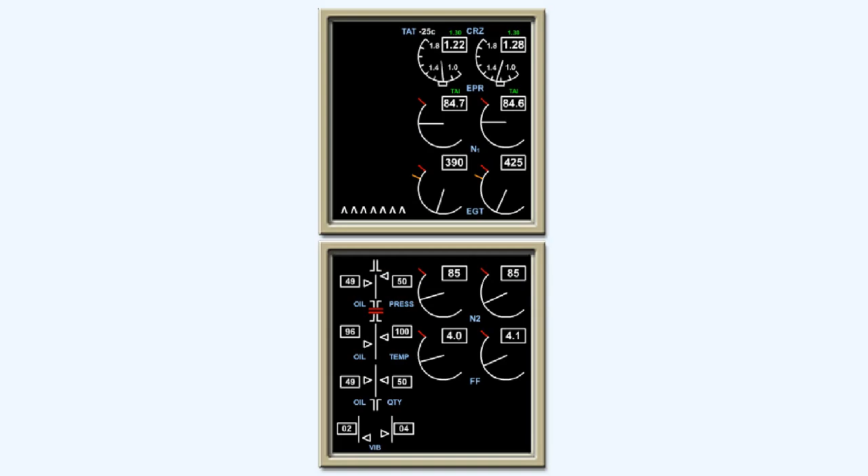As far as EICAS is concerned, engine operating data is displayed on its cathode ray tube units, thereby eliminating the need for traditional engine instruments.

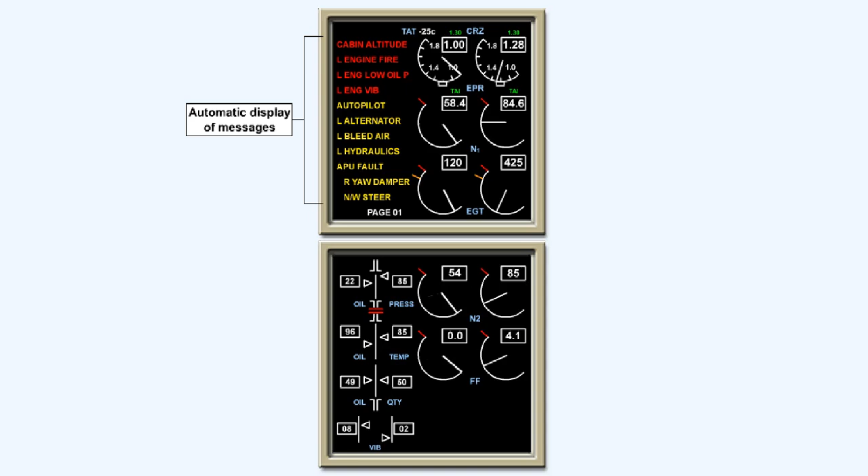Engine operating data, as well as that relevant to other systems, is not necessarily always on display. But in the event of malfunctions occurring at any time, the flight crew's attention is drawn to them by an automatic display of messages in appropriate colors.

However, in the Airbus A310, in which system operation was displayed in checklist and schematic form, the early ECAM concept was based on the view that engine data needed to be displayed during the whole of a flight, and accordingly traditional engine instruments were retained.

It's of interest to note, however, that in subsequent types produced by this manufacturer, for example the A320, the ECAM system is developed to include the display of engine data in one of its display units.

The basic EICAS system comprises two display units, a control panel which is called the Display Select panel, and two computers which are supplied with analog and digital signals from engine and system sensors. The computers are designated left and right, and only one is in control at a time. The other is on standby, and in the event of failure, it may be switched in either automatically or manually.

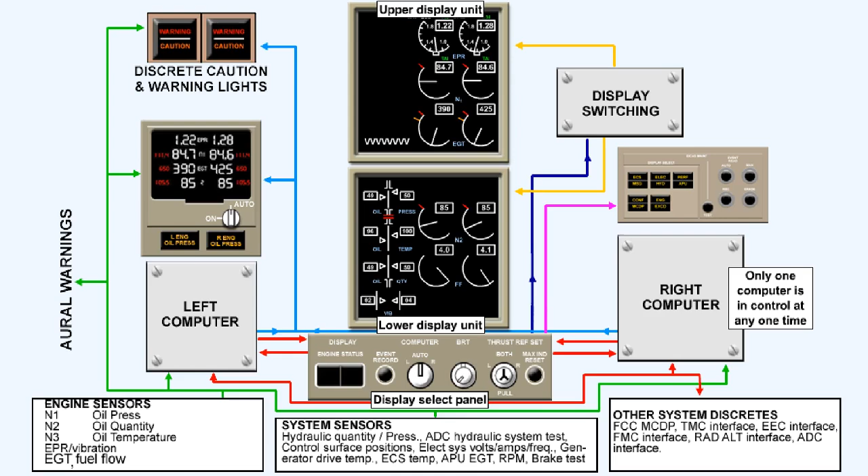Operating in conjunction with the EICAS system are discrete caution and warning lights, which are situated on the front coaming, a standby engine indicator panel, and a remotely located panel for selecting maintenance data displays.

The system provides the flight crew with constantly displayed information on primary engine parameters, and with secondary engine parameters and advisory, caution, warning alert messages displayed as required.

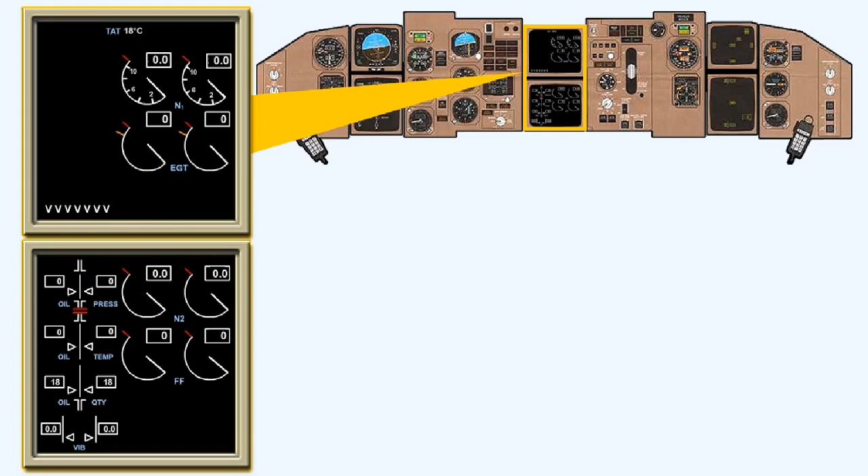The display units provide a wide variety of information relevant to engine operation and operation of other automated systems, and they utilize color cathode ray tubes. The units are mounted one above the other.

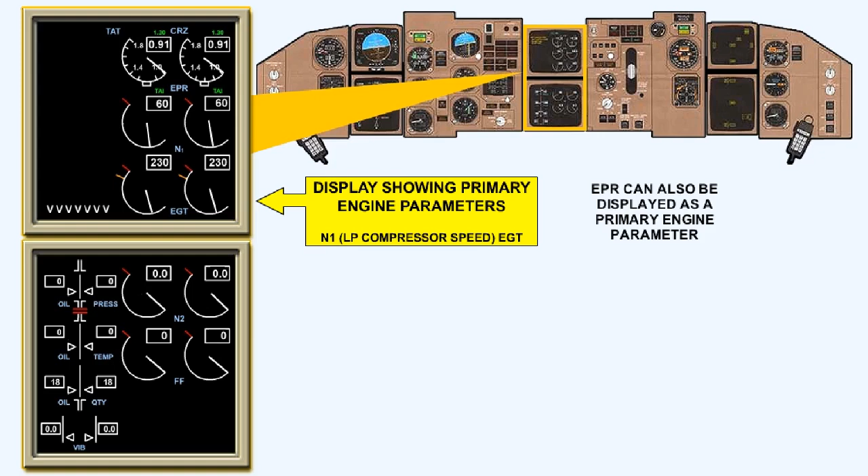The upper unit displays the primary engine parameters, N1 speed, exhaust gas temperature, and warning and caution messages. In some cases, this unit can also display the engine pressure ratio, depending on the type of engines installed and on the methods used to process data by the thrust management control system.

The lower unit displays secondary engine parameters, that is N2 speed, fuel flow, oil quantity, pressure and temperature, and engine vibration.

In addition, the status of non-engine systems, for example, flight control surface positions, hydraulic systems, the auxiliary power unit, etc., can also be displayed, together with aircraft configuration and maintenance data.

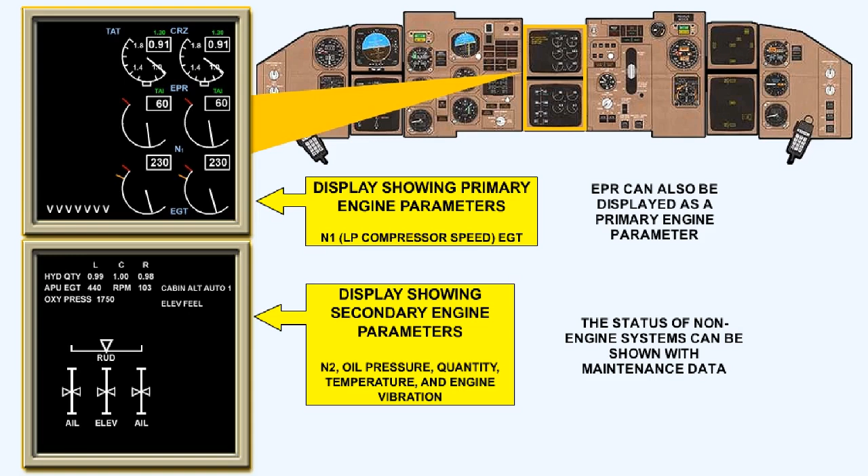The row of V's shown on the upper display unit only appears when secondary information is being displayed on the lower unit.

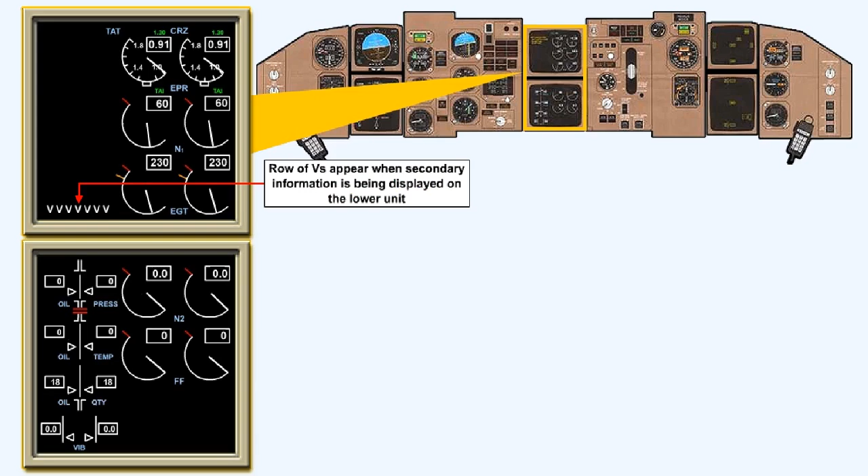Seven colors are produced by the cathode ray tubes, and they are used as follows. White: all scales, normal operating range of pointers, digital readouts. Red: warning messages, maximum operating limit marks on scales, and digital readouts.

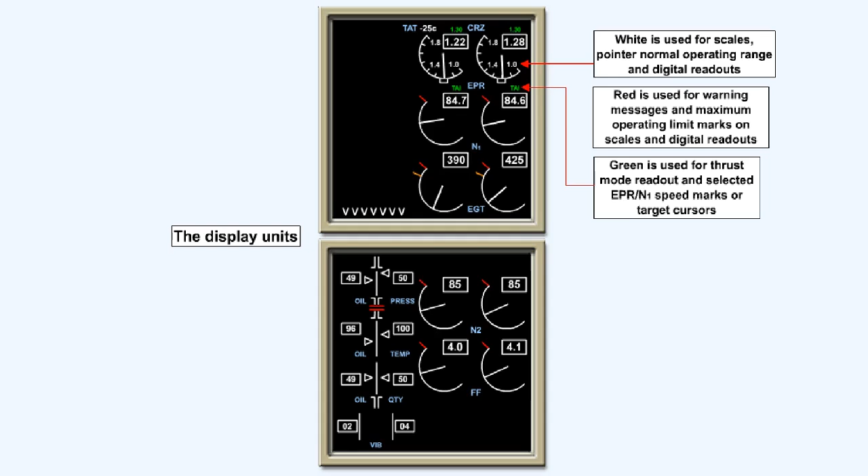Green: thrust mode readout and selected EPR and N1 speed marks or target cursors. Blue: system testing only.

Yellow: caution and advisory messages, caution limit marks on scales, digital readouts. Magenta: during in-flight engine starting and for cross-bleed messages. Cyan: names of all parameters being measured, for example, N1, oil pressure, TAT, etc., and status marks or cues.

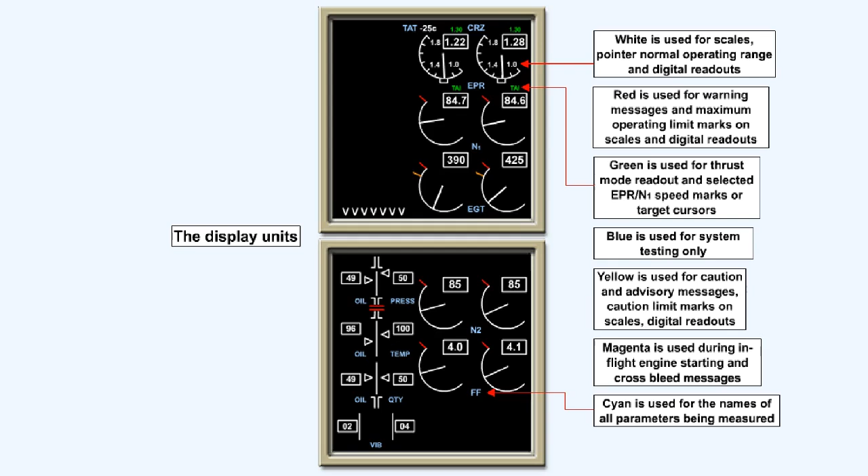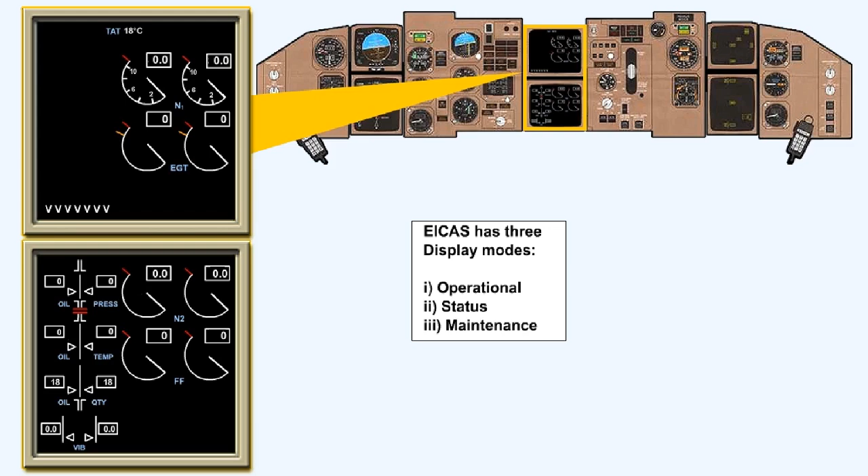EICAS is designed to categorize displays and alerts according to function and usage, and for this purpose there are three modes of displaying information: operational, status, and maintenance.

Operational and status modes are selected by the flight crew on the Display Select panel, while the maintenance mode is selected on the maintenance panel, which is for the use of ground engineering staff only.

The operational mode displays the engine operating information and any alerts which are required to be actioned by the crew. Normally, only the upper display unit presents information.

The lower one remains blank, but it can be selected to display secondary information as and when required by pressing the Engine button on the Display Select panel.

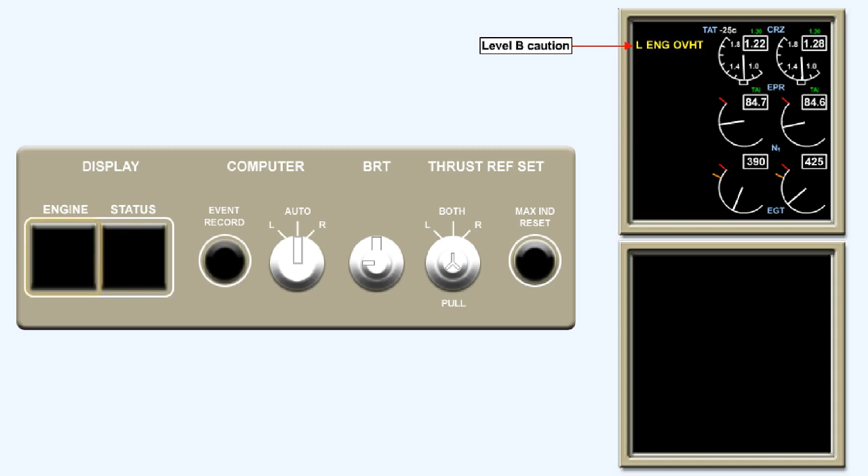Use your mouse to press the Engine button on the Display Select panel to see secondary information being shown on the bottom screen.

When selected by pressing the Status button on the Display Select panel, the Status mode allows data to be displayed on the bottom screen, which is used to determine the dispatch readiness of an aircraft. This data is closely associated with details contained in the aircraft's minimum equipment list.

The display on the bottom screen shows positions of the flight control surfaces in the form of pointers registered against vertical scales, selected subsystem parameters, and equipment status messages. Selection is normally done on the ground, either as part of the pre-flight checks of dispatch items or prior to shutdown of electrical power, to aid the flight crew in making entries in the aircraft's technical log.

Use your mouse to press the Engine and Status buttons on the Display Select panel to change the information shown on the bottom display between engine secondary information and the status display.

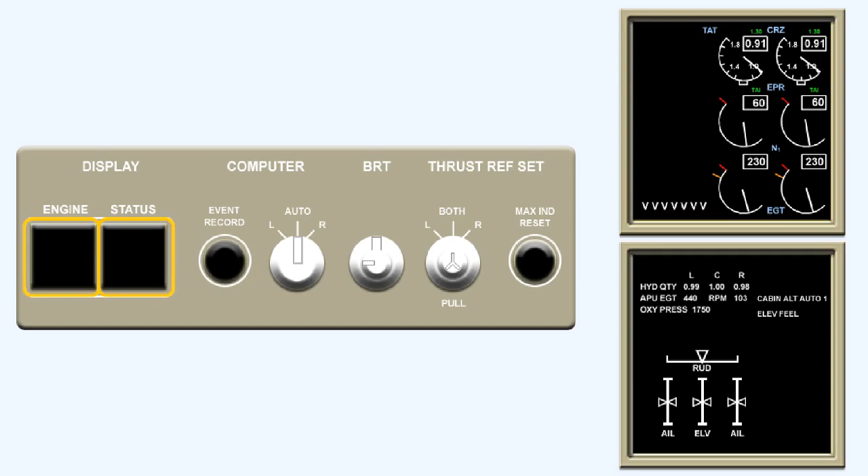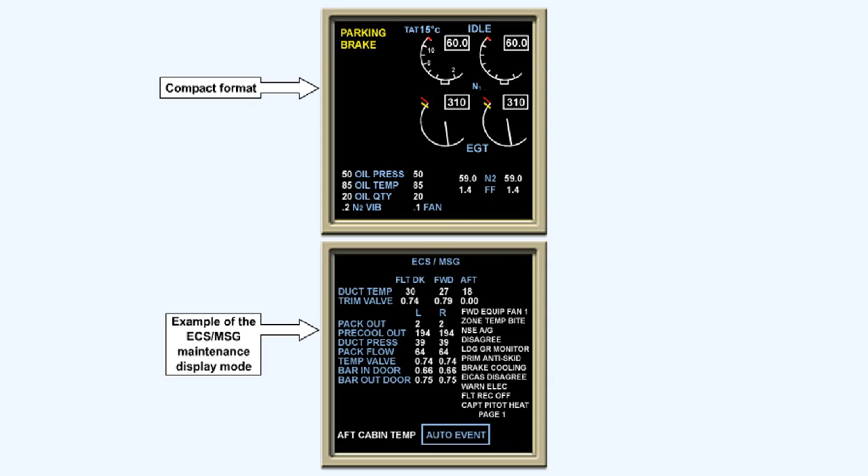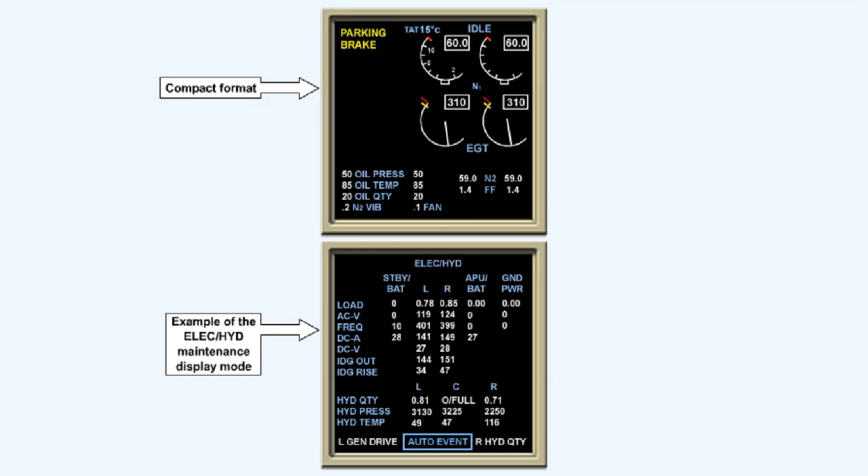The Display Select panel permits control of EICAS functions and displays, and can be used both in flight and on the ground. It's located on the center pedestal on the aircraft flight deck. Moving your mouse cursor over each control will display the purpose of each of them.

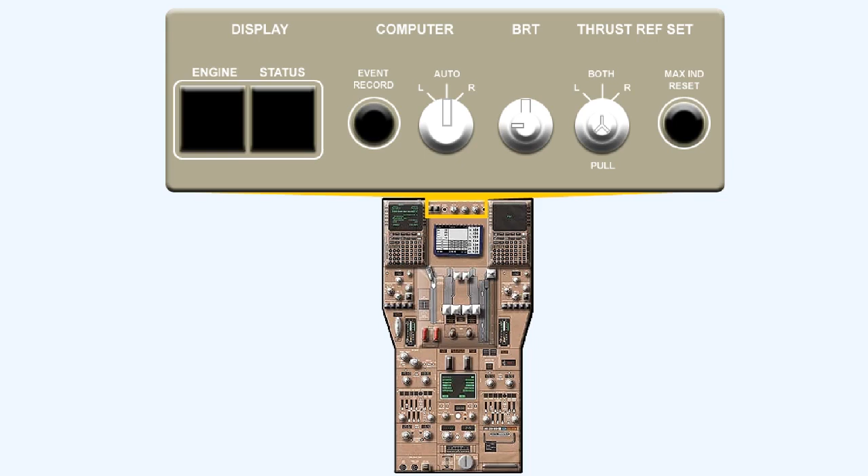The system continuously monitors a large number of inputs, typically over 400 from engine and airframe system sensors, and will detect any malfunctioning of systems.

If any malfunction should occur, then appropriate messages are generated and displayed on the upper display unit in a sequence corresponding to the level of urgency of action to be taken.

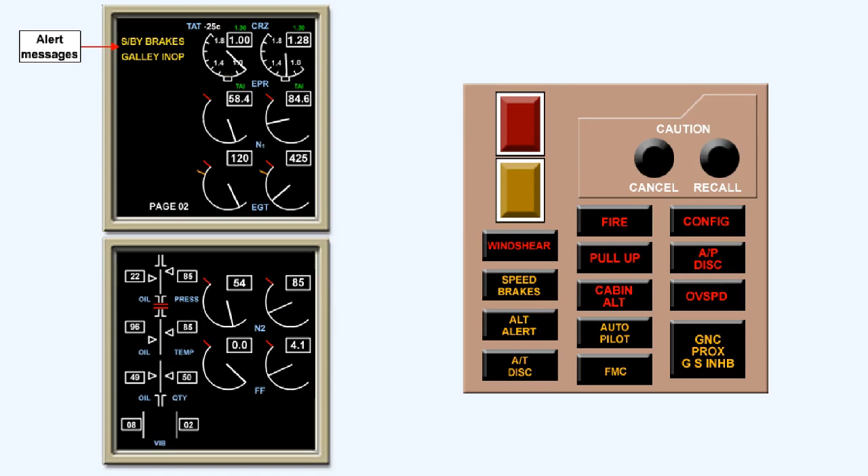Up to 11 messages can be displayed on the top line at the left of the display screen and at the following levels.

Level A, Warning, requiring immediate corrective action. Level A warnings are displayed in red. Master warning lights are also illuminated, and aural warnings, for example the fire bell, from a central warning system are given.

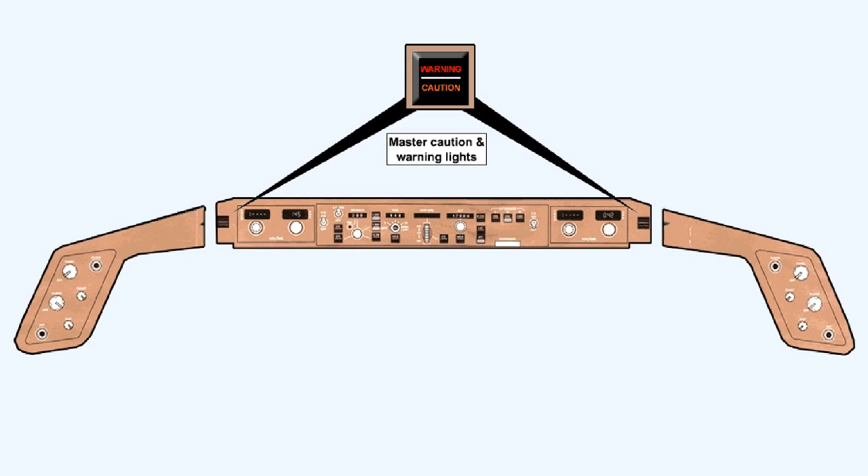Level B, Caution, requiring immediate crew awareness and possible action. These are displayed in amber, and also by master caution lights. There is also an aural tone which is repeated twice.

Level C, Advisory, requiring crew awareness. Advisories are also displayed in amber. No caution lights or aural tones are associated with this level.

In order to differentiate between a caution and an advisory, the latter is always indented one space to the right.

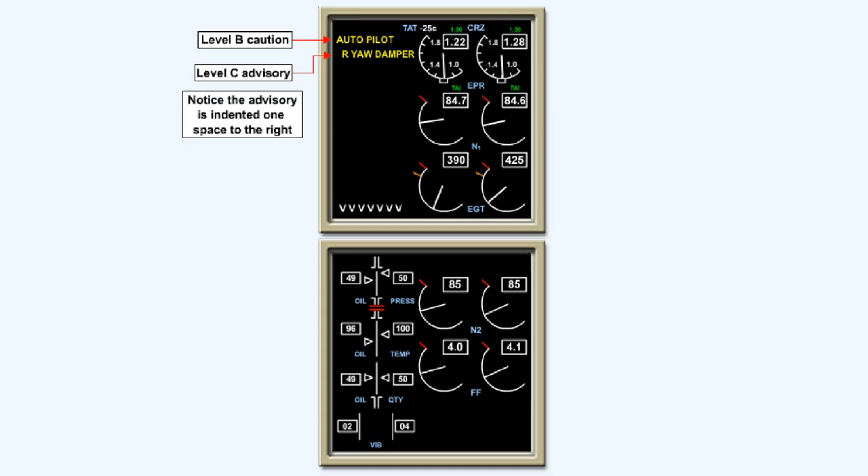When a new fault occurs, its associated message is inserted on the appropriate line of the display. The occurrence of a new fault may cause older messages to move down one line. For example, a new warning message would cause all existing warning, caution, and advisory messages to move down one line.

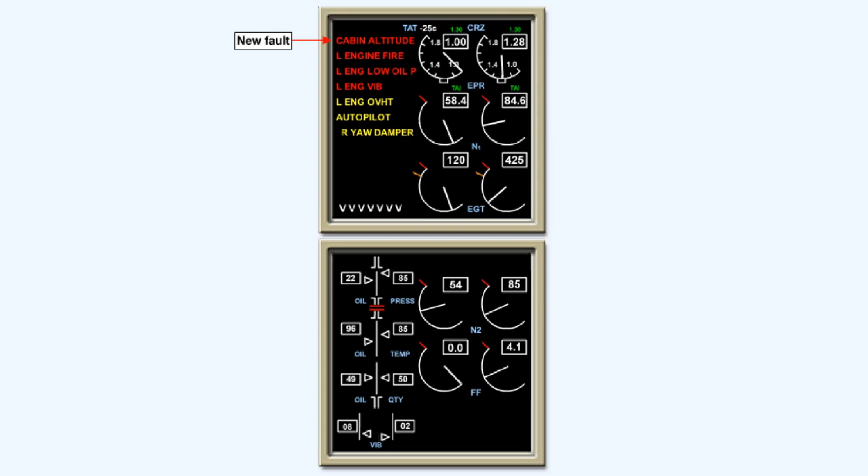A message is automatically removed from the display when the associated condition no longer exists. In this case, messages which appear below the deleted one each move up a line.

If there are more messages than can be displayed at one time, the whole list forms what is termed a page, and the lowest message is removed, and a page number appears in white on the lower right side of the list.

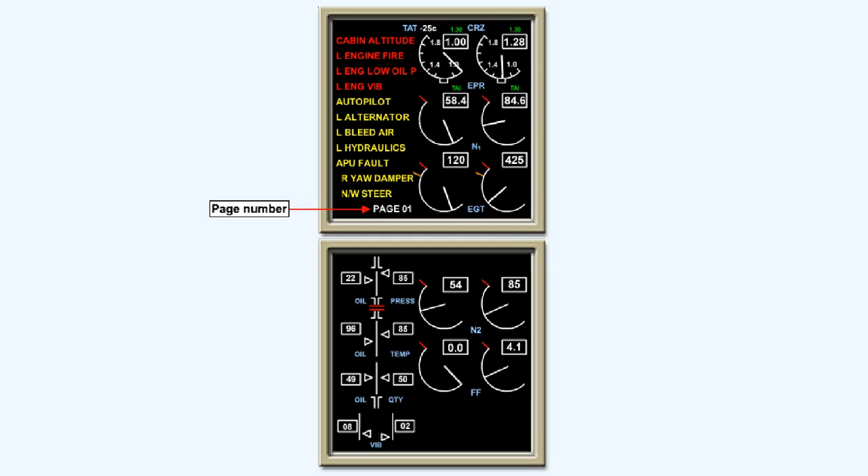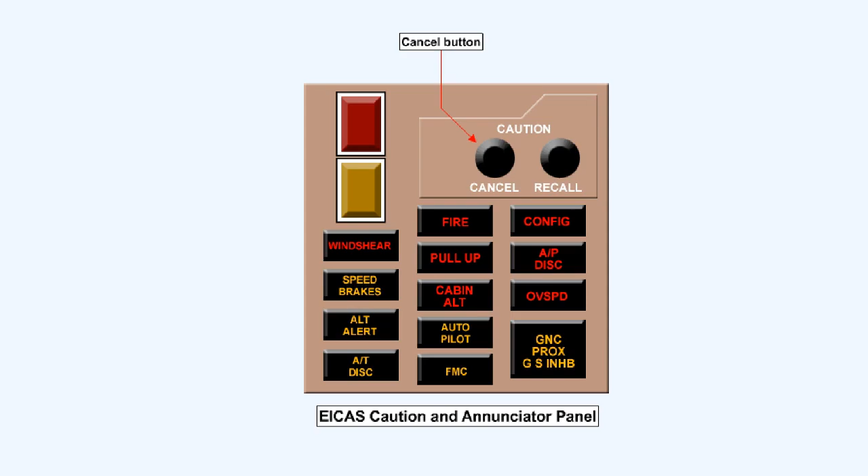If there is an additional page of messages, it can be displayed by pushing the Cancel switch on the EICAS Caution and Annunciator panel. We'll show the EICAS Caution and Annunciator panel shortly. Warning messages are carried over from the previous page.

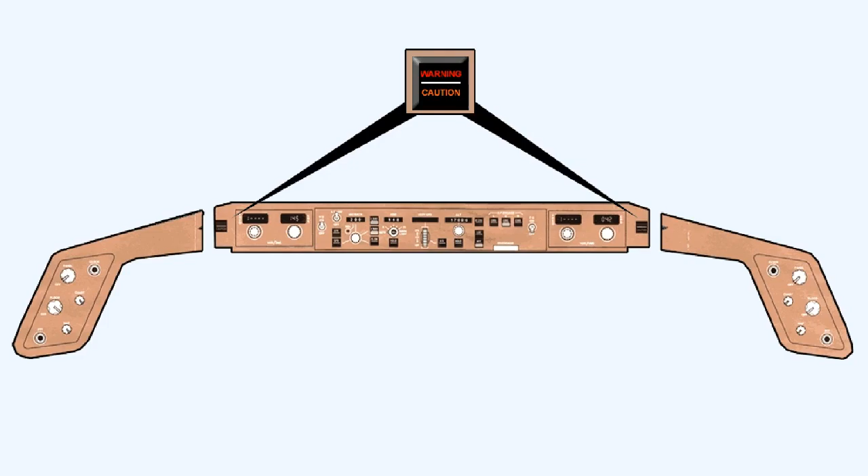The captain and first officer each have a dual-purpose warning caution light on their side of the glare shield. Part of the EICAS Caution and Annunciator panel is used to position cancel switches and a recall switch.

Pushing the cancel switch removes only the caution and advisory messages from the display. The warning messages cannot be cancelled. Moving your mouse cursor over each control or indicator will display their purpose.

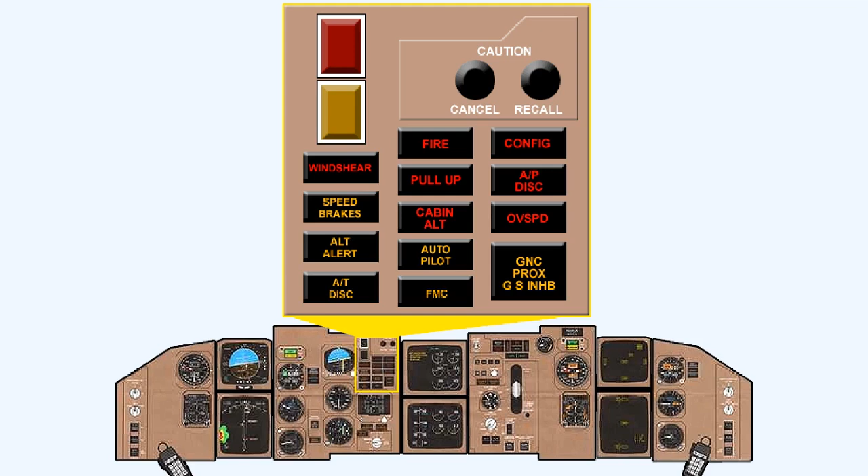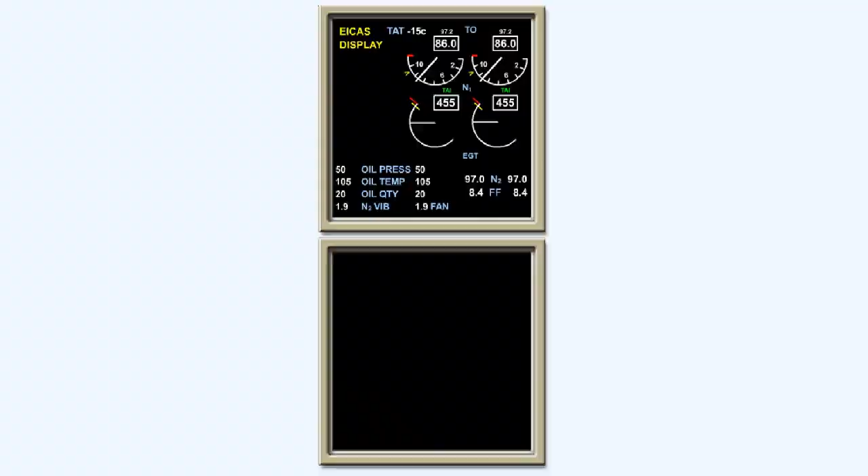The format of this display is referred to as compact, and it may be removed by pressing the Engine switch on the Display Select panel.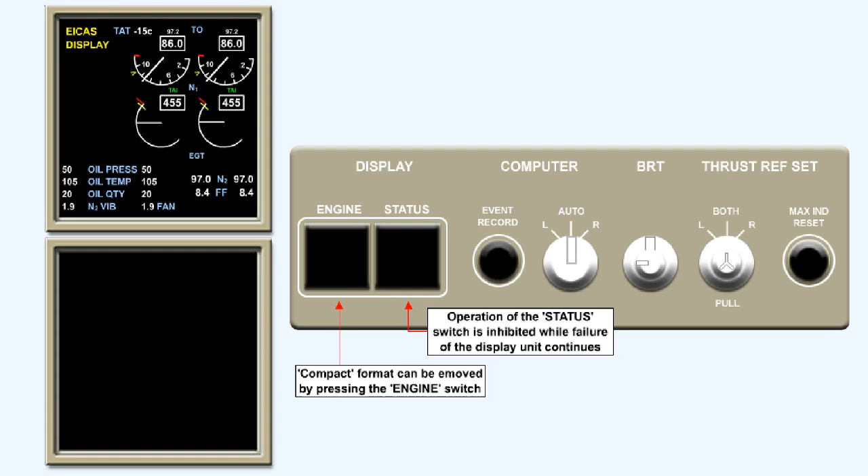Failure of a display unit causes the function of the status switch on the Display Select panel to be inhibited, so that the status page format cannot be displayed.

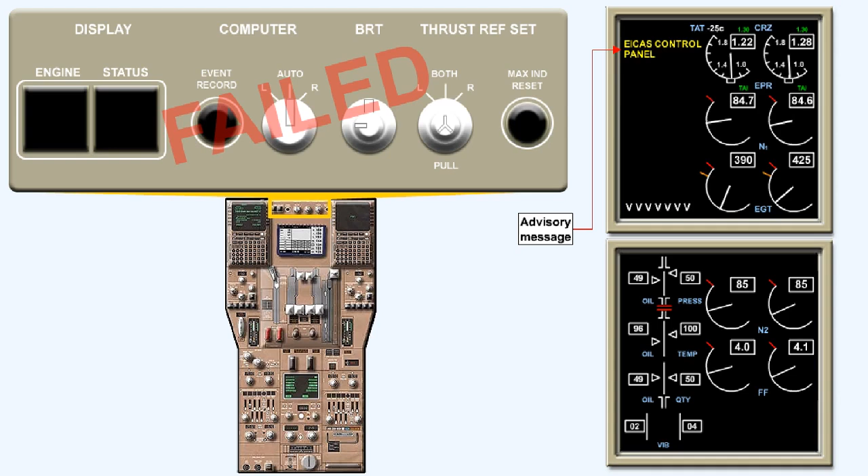If the Display Select panel fails, the advisory message EICAS Control Panel appears at the top left of the upper display unit, together with the primary information, and the secondary information automatically appears on the lower display unit. The cancel recall switches do not operate in this failure condition.

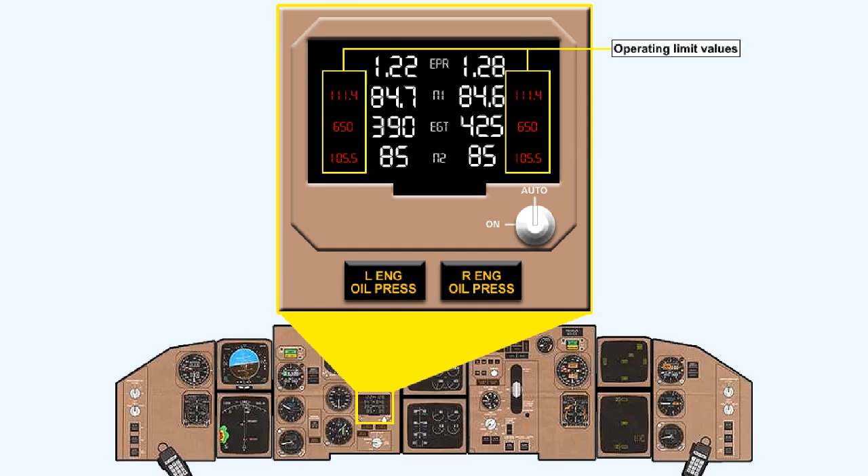The standby engine indicator provides primary engine information in the event that a total loss of EICAS display occurs. The information shown relates to N1 and N2 speeds, EPR and EGT, and the displays are of the LCD type. Operating limit values are also displayed.

Moving your mouse cursor over each part of the indicator will display the purpose of it.

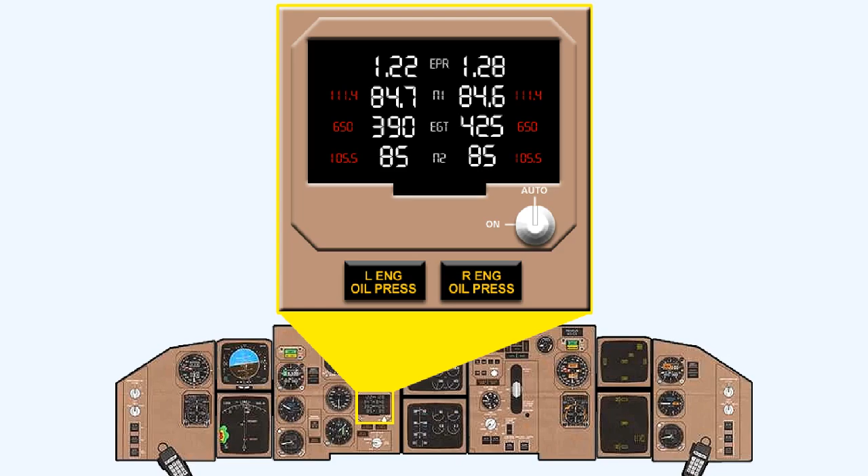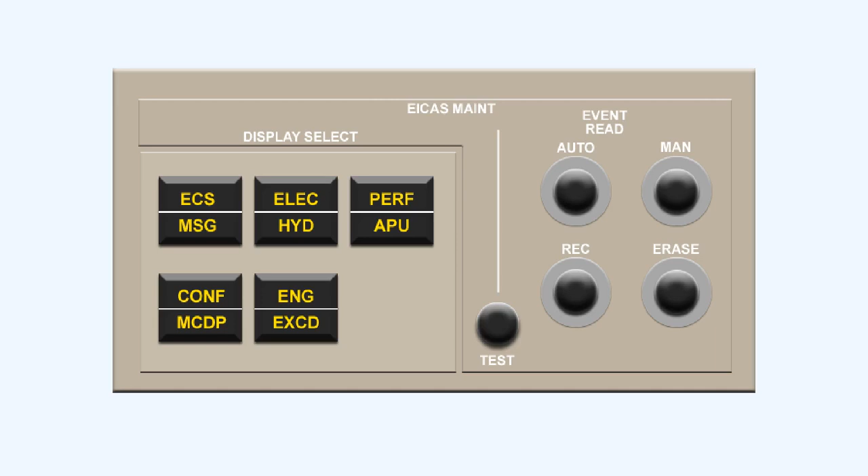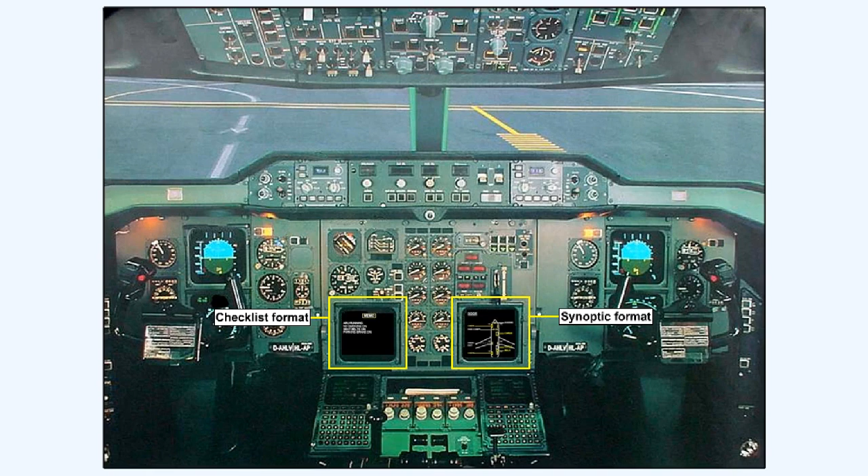As far as the processing and display of information are concerned, the ECAM system differs significantly from EICAS, in that the displayed data relates essentially to the primary systems of the aircraft, and is shown in checklist and pictorial or synoptic format. Engine operating data is displayed by conventional types of instruments.

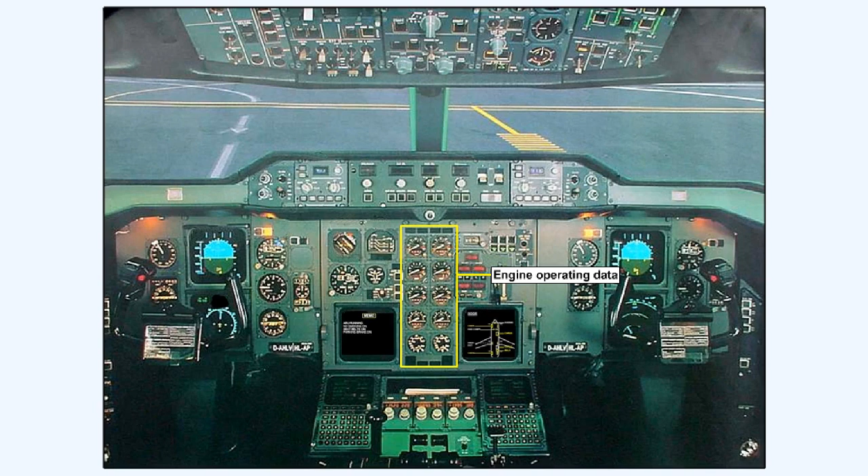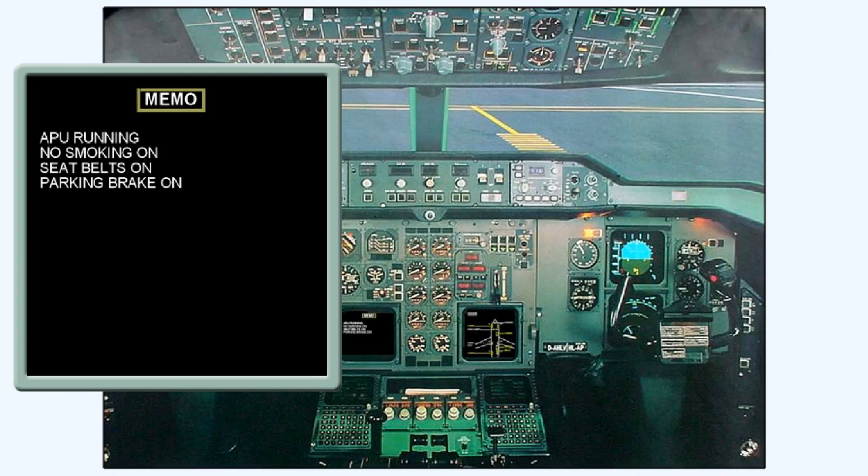Other differences between the EICAS and ECAM systems relate to display locations and methods of selection of system operating modes. The display units are mounted side by side in the early version of the A310. The left-hand unit is dedicated to information on the status of systems, warnings, and corrective action in a sequenced checklist format, while the right-hand unit is dedicated to associated information in pictorial or synoptic format.

There are 4 display modes, 3 of which are automatically selected. The first is referred to as flight phase related. The second is the advisory mode and status. The third mode is failure related. The fourth mode is selected manually and called the aircraft system display.

In normal operation, the flight phase related mode automatically displays graphics appropriate to the current phase of aircraft operation. Those phases could be pre-flight, takeoff, climb, cruise, descent, approach, or after landing.

In this example of the pre-flight phase, the left-hand display unit displays an advisory memo mode, and the right-hand unit displays a diagram of the aircraft's fuselage, doors, and arming of the escape slides deployment system.

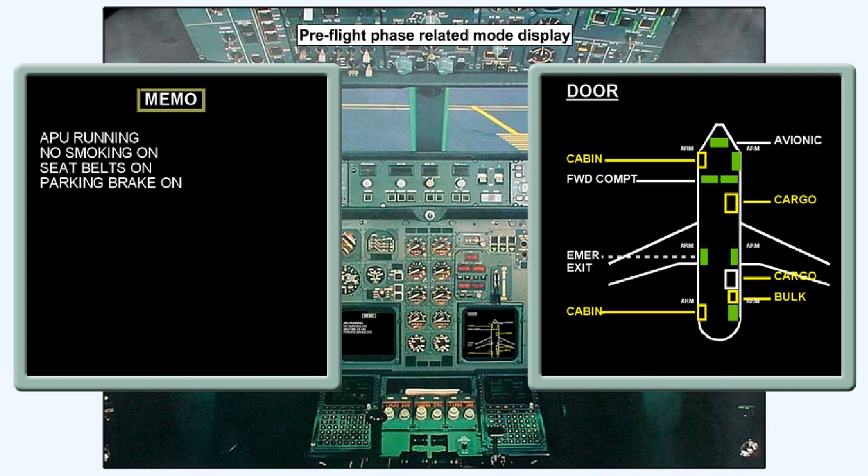Status messages, which are also displayed on the left-hand display unit, provide the flight crew with an operational summary of the aircraft's condition, possible downgrading of auto-land capability, and, as far as possible, indications of the aircraft status following all failures except those that do not affect the flight.

This example of an advisory display shows any aircraft limitations caused by the condition of the aircraft in blue font, any systems or system functions which have been lost or affected in yellow font, and any further information deemed to be useful in white.

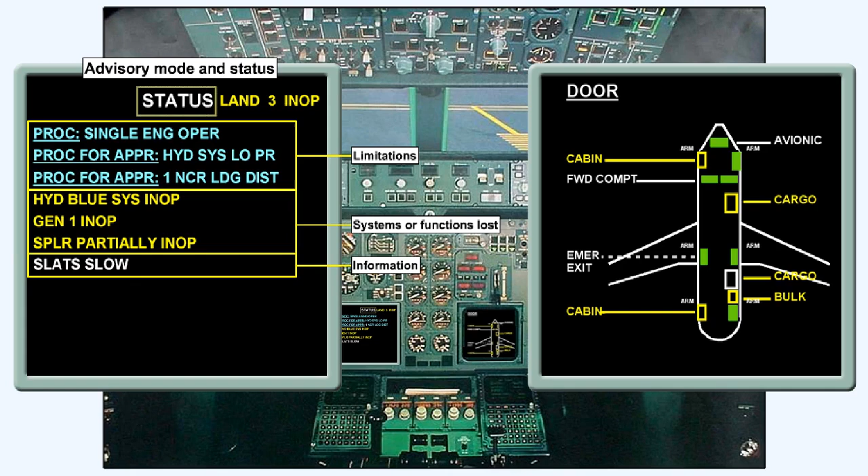The failure-related mode takes precedence over the other 2 automatic modes and the manual mode.

In this example of a failure-related mode display, while taxiing out for takeoff, the temperature of the brake unit on the rear right wheel of the left main landing gear bogie has become excessive.

A diagram of the wheel brake system is immediately displayed on the right display unit, and simultaneously the left unit displays the corrective action to be taken by the flight crew.

As the corrective action is carried out, the instructions on the left-hand display are replaced by a message in white confirming the result of the action. The diagram on the right-hand display unit is appropriately redrawn as its system parameters change.

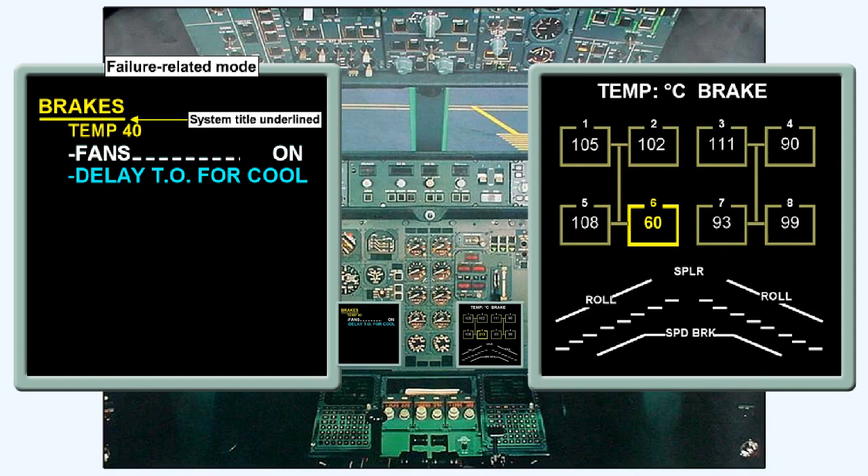In this example, the failure-related mode warning relates to a single system, and by convention, such warnings are signified by underlining the system title displayed.

In cases where a failure can affect other subsystems, the title of the subsystem is shown boxed, as is shown in this example.

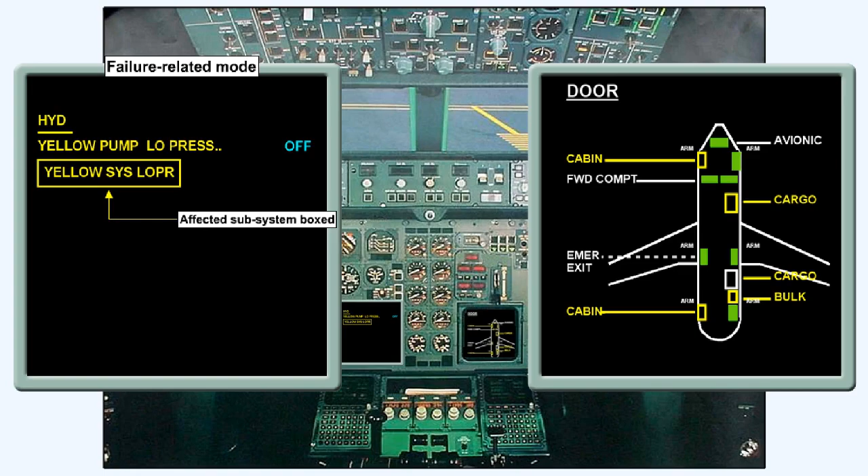Warnings and the associated lights are cleared by means of clear push-button switches on the ECAM control panel.

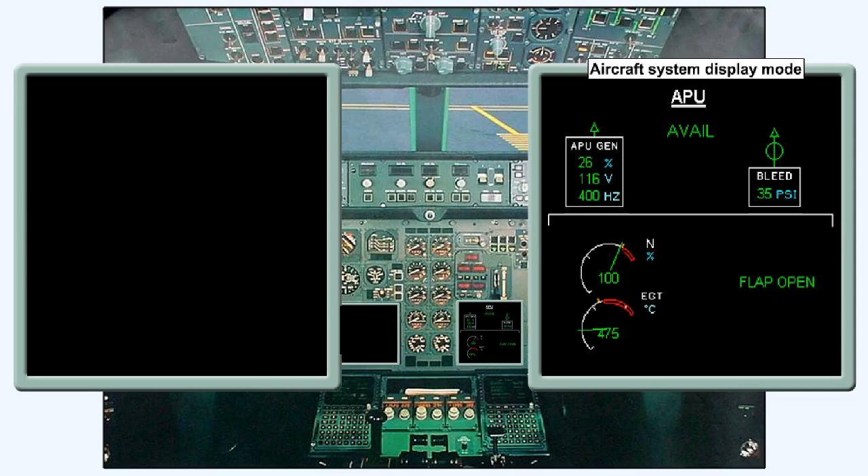The aircraft system display mode permits the selection of diagrams related to any one of 11 of the aircraft systems for routine checking, and also the selection of status messages, provided no warnings have been triggered for display.

The selections that determine which systems are displayed are made by means of illuminated push-button switches on the system control panel.